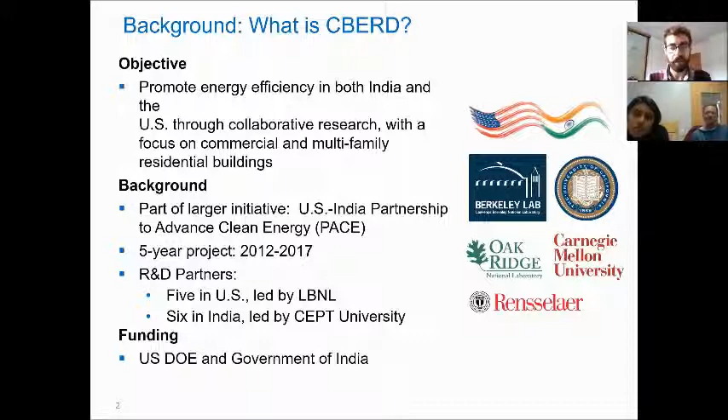And there's a bunch of research and development partners across both countries. Within the United States, they're being led by Lawrence Berkeley National Labs, and then in India, it's being led by CEPT University. So just a little bit more about what my specific role was. I was working on one of 6 tasks within this organization, which was called Task 6, or Climate Responsive Buildings.

And just to go a little bit further into what that means, the objective of this task was to better understand the performance of well-designed, passively designed buildings. For those who don't know what passive design is, this is strategies such as natural ventilation and nighttime ventilation and increased air movement.

So within this area of climate responsive buildings, my specific task when I was in India over the summer was looking at what you see in red there at the bottom, which was the physical performance of buildings in India, in addition to a laboratory study that focused on thermal comfort. So I'm going to give some updates first on the work that I did regarding building monitoring in India, and then I'll go a little bit into the laboratory study that I conducted.

So you were in the red part of India, the hot and dry. You were working there? For the most part, yes. So I was in 2 zones of India. For my first portion, I was in a city called, I guess it was more of a village called Auroville, which is in southern India. It's close to Pondicherry. Okay. And then for the remainder of the time, for the most part, I was in that hot and dry region in Ahmedabad. In Ahmedabad, okay.

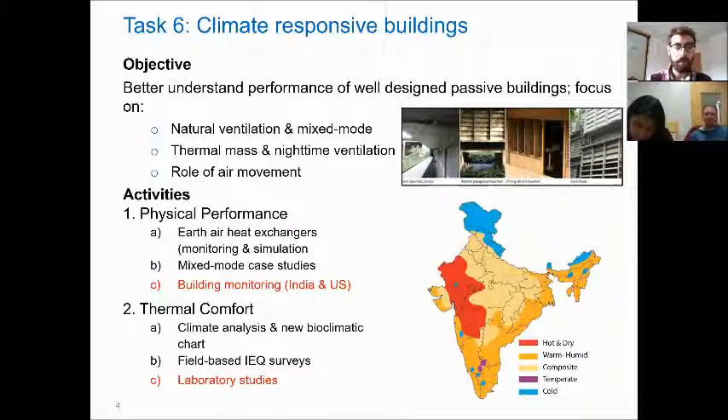One of the most innovative strategies we saw that's really unique to India was this idea of walls that had the sort of cavity walls that were used to increase the air movement and for higher insulation properties for the buildings in India. And that's something that we hadn't really seen in the United States before. What does that mean, cavity walls?

So it's a very basic concept, but in essence, it's walls that had either air cavities or air spaces inside them that allowed air sometimes to flow through or sometimes air to just get caught in that cavity, which helps increase the insulative property of the wall. It's a very basic, really low technology strategy for cooling inside the buildings, but it's fairly unique to the buildings we saw in India. And they were mostly made out of cement, right? A lot of them, yes, mostly either cement or some form of concrete.

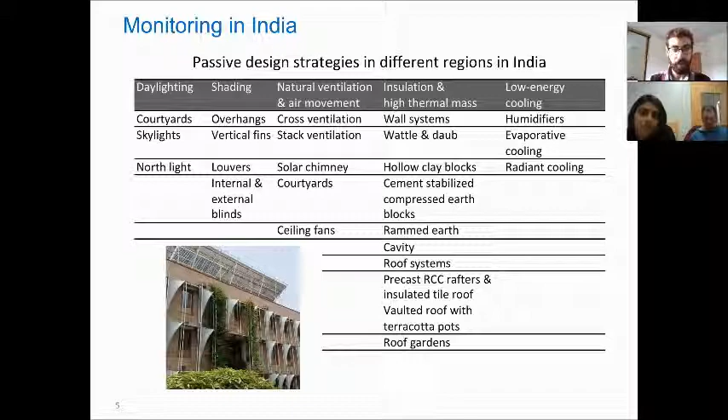And currently, while I was there and still continuing, I'm looking at conducting some analysis, looking at the performance of these different strategies and how they are performing specifically with regard to comfort of the people inside the buildings.

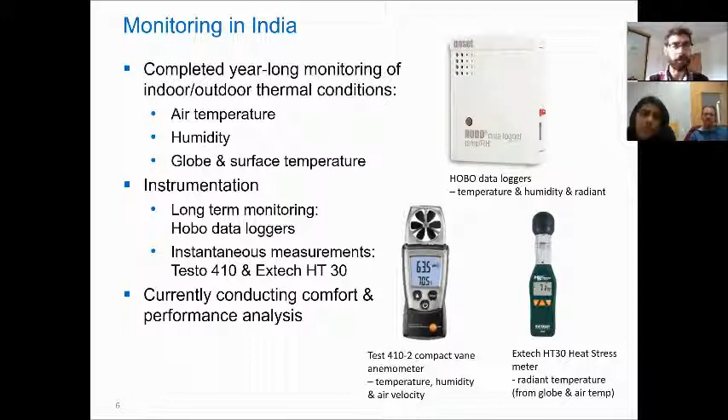So we've been collecting data there for the past year, and while I was there, I consulted with all of the building owners. I started obtaining a lot of the data that we were looking at, and started actually doing some of the analysis to see how these buildings were performing.

Like Jared, it seems like the highs and lows are more contained indoor than outdoor, like more of a straight line. You can't expect too many highs or too many lows inside versus outside. Is that what we're saying?

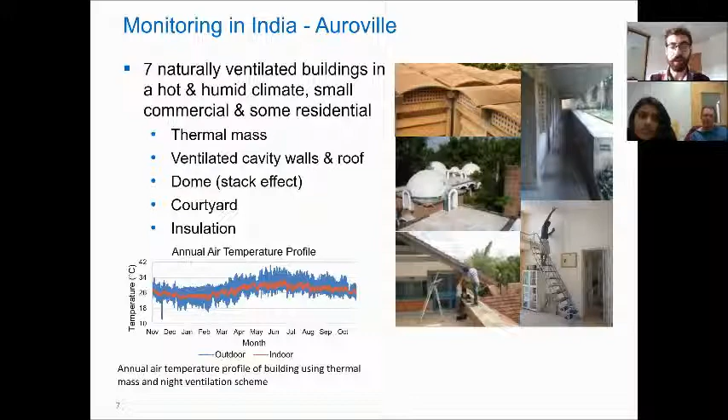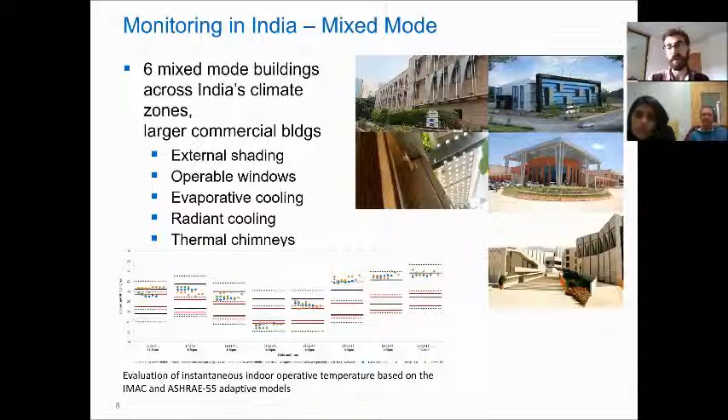So switching gears a little bit, I was also responsible for coordinating a study that was done in the new thermally controlled chamber that was just built at CEPT University. I know that term is not so common, so just to explain what that means, there's a room that was just recently constructed, and the people who work at the research center have the ability to manipulate the temperature and humidity of the room very specifically and to a very minute degree, so that you can test different conditions in the chamber and see how people respond to them.

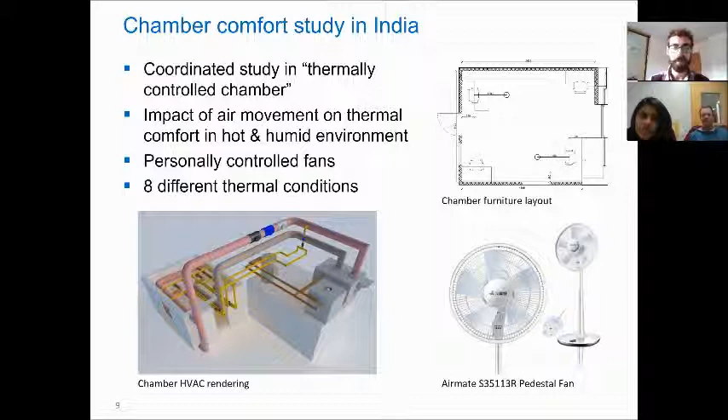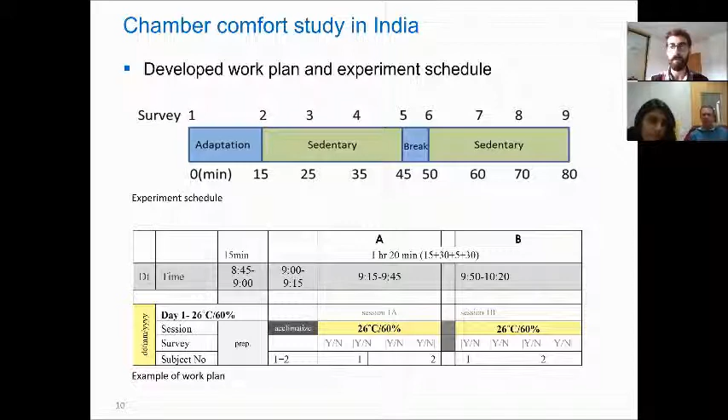So before we were actually able to initiate the study, we developed a pretty intensive work plan just to coordinate when subjects would be able to enter the chamber and which different conditions we wanted to test on which days. And also before we were able to allow subjects into the space, we had to calibrate all of the equipment. We wanted to specifically see what the different air velocity and fan powers were for each of the settings with these pedestal fans to determine how their chosen air velocity impacted their specific thermal comfort.

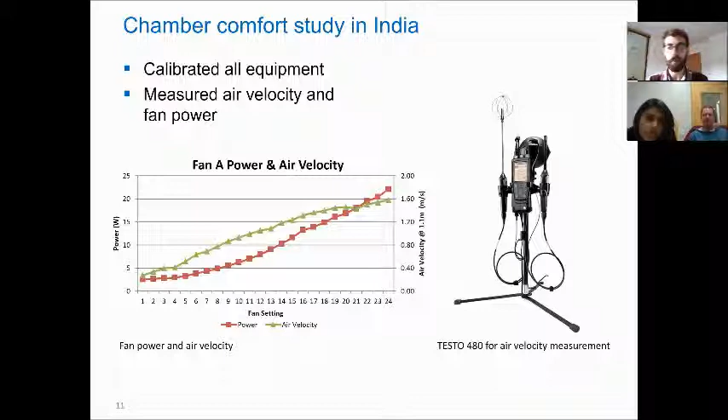And then we had 20 different subjects do the study with us. We made sure that all 20 subjects were acclimated to the hot Indian climate in Ahmedabad, where they were currently residing. We also made sure they all wore a typical Indian summer work attire. And I was responsible for actually administering the experiments in the space and interacting with all of the human subjects. So, Jared, how did you actually get these subjects? I mean, did you go out and ask them? How did you do that?

Yeah, so the research center that I was working for was responsible for finding the subjects. The ages of the people who participated were all within like 10 to 15 years of each other. Most were either employees or students of the university. So I wasn't so much responsible for getting them there, but once they were chosen, I was responsible for interacting with them and making sure they knew what they were doing.

Okay. So when I say they participated in the study, what that means is that they sat in the chamber for about an hour and a half at a time in 8 different scenarios, each with the room in a different condition, at some variation of a very high temperature and high humidity. And about every 15 minutes or so, they answered a survey on the computer in front of them, asking how they felt about their thermal environment, if they were comfortable, if they found the temperature acceptable, if they wanted to be warmer or cooler, how satisfied they were with their air velocity, or if they wanted to increase or decrease their air velocity.

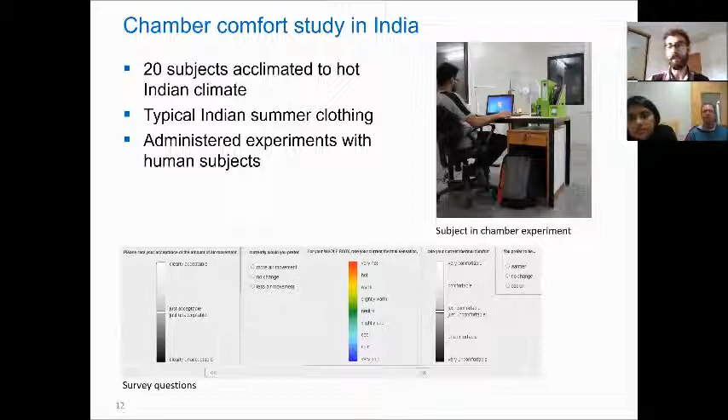So once that was all complete, the next step was to actually analyze our results, analyze the data, and see what these people were saying and how they were responding to these different conditions. So the first thing we looked at was their chosen air velocities. As you can see here, these are the 8 different conditions which we tested at, ranging from 26 degrees Celsius and 60% relative humidity to 32 degrees Celsius and 80% relative humidity.

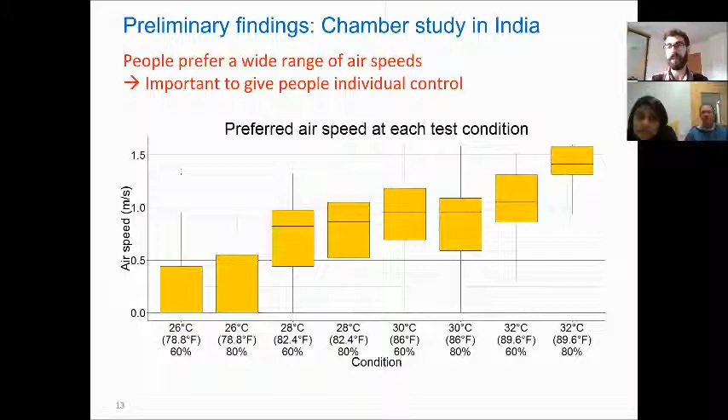The biggest takeaway that we saw from this was just that the subjects had a really wide range of airspeeds that they preferred. If you look at the middle 4 conditions, their airspeed preference ranged from 0 meters per second to about 1.5 meters per second. So the biggest takeaway here is that it's really important to give people individual control of their airspeed to satisfy their comfort.

The next thing we wanted to see was to what extent the air movement actually compensated for the hot and humid conditions for the individual's comfort and temperature acceptability. So first we looked at the parameter of thermal acceptability, and as you can see here, for each of the conditions, up to 32 degrees Celsius and 60% relative humidity, at least 90% of the subjects found that condition acceptable.

This is really significant because in previous studies of a similar nature in other parts of the world, we've really never seen people reach this level of acceptability higher than about 30 degrees Celsius and 60% humidity. So this jump up to 32 degrees Celsius might mean that people in India are just more accepting of their thermal environment at higher temperatures.

Are you comparing them to people in other hot climates like Africa, or to people in the U.S.? Yeah, so the studies that we're currently comparing it to have been done in the United States and Denmark and China. So India is probably the hottest climate that these tests have been done in, which might simply indicate that the people who are acclimated to the Indian climate have the highest expectation for these high temperatures.

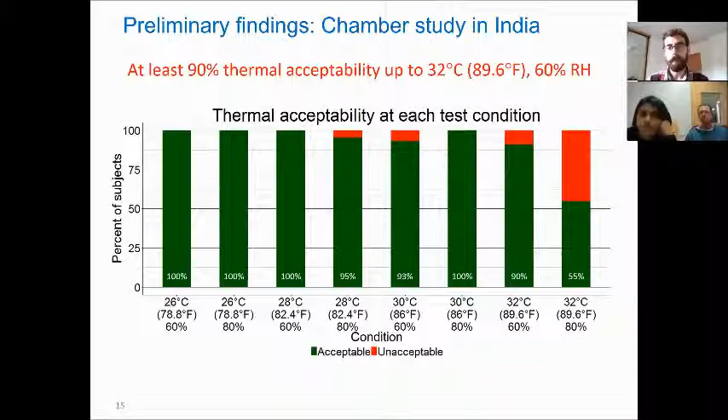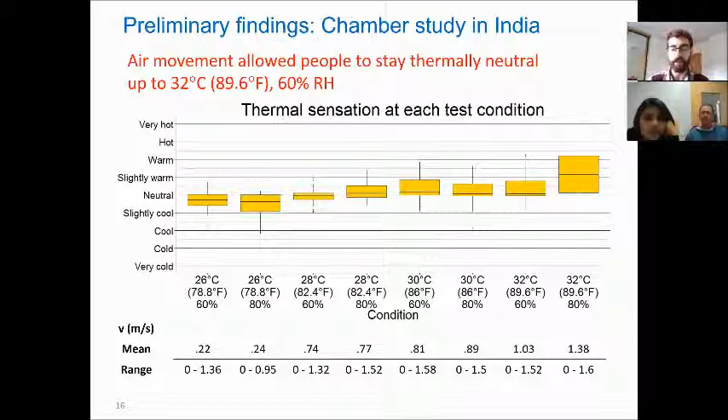Okay. In addition, we looked at the parameter of thermal sensation, where subjects were able to choose between feeling very cold all the way to very hot, with neutral being in the center. And once again, the results here were fairly significant for us because it showed that up to that same value of about 32 degrees Celsius and 60% relative humidity, almost all subjects felt in this neutral zone between slightly cool and slightly warm. And this is really something that was unprecedented in tests done in other countries.

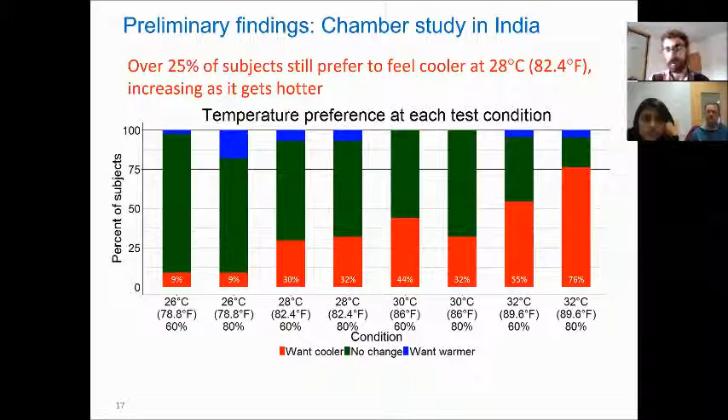So this tells us that as designers or as practitioners, the question is, what do we really want to know? Do we want people to feel as though their area is acceptable or neutral, or do we want them to actually feel as though they don't want it to be warmer or cooler? So this is a question moving forward in the research that's still being looked at.

So in terms of the current work and the next steps for the project, which are still going on, I mentioned there were studies done in other countries. So there's a desire to see how this data really compares with these other studies. As you can see on the screen, this is data from the Indian study, in addition to 2 similar studies done in the United States. We're looking at a parameter called standard effective temperature, on the x-axis, which is a combined effect of the temperature, humidity, and air velocity.

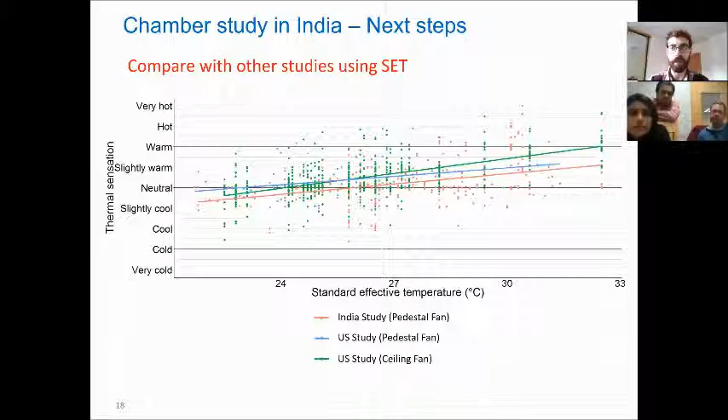We can see from these linear regression lines that the data from the Indian study is significantly below both lines for the US studies, which once again shows what we would have expected, that the Indian subjects stayed closer to the neutral area than the US subjects did. So this is work that's still going on, and it will be further investigated probably in the next few months. And that is a summary of what my role was within the project when I was in India.